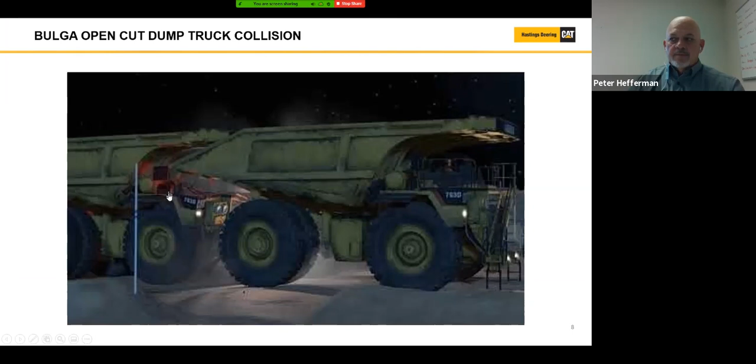At about 3:30 a.m. on 23rd of July 2018, a mine worker was driving an unloaded Caterpillar dump truck along a haul road at the Bulga open cut mine towards an intersection. The road and the intersection were not illuminated. The driver saw a grader, another dump truck, and a water cart at the intersection. The driver stopped to give way to the other vehicles in accordance with the mine's road rules.

Another mine worker was driving a second unloaded Caterpillar dump truck along the same haul road. He noticed that the truck ahead was coming to a stop. The driver lifted his foot from the accelerator to allow his truck to slow with the intention of stopping behind the truck. At that time, the driver became unresponsive as a result of a microsleep or medical condition.

The truck collided with the rear of the stopped truck. At the time of the collision, the truck was traveling at 41 kilometers per hour. The force of the collision moved the stopped truck forward about 20 meters.

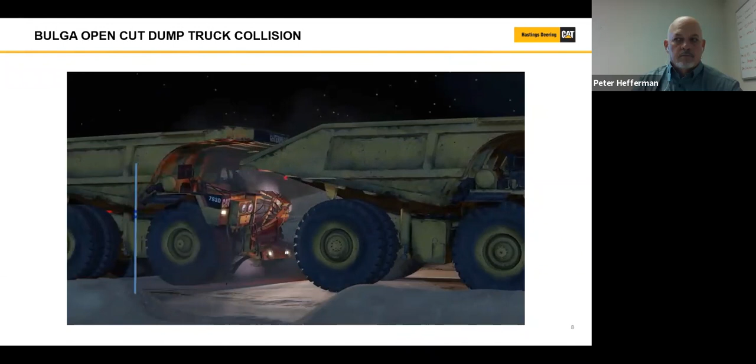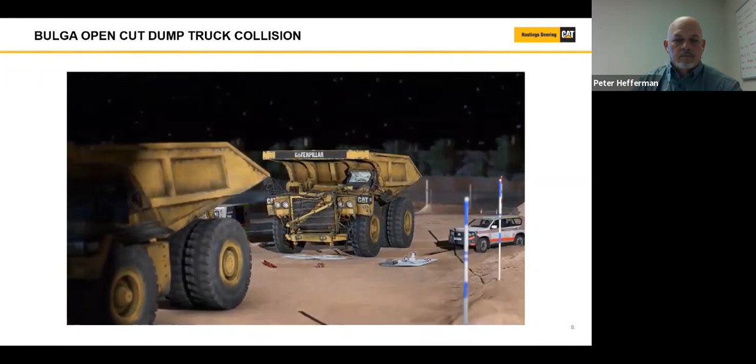An emergency response was activated. The driver was trapped with his right foot twisted between the brake and accelerator pedals. Once freed from the cabin, an elevated work platform was used to lower the driver to the ground, and he was transported to hospital by ambulance. He suffered a fractured tibia, laceration to right eye, and minor cuts and bruises.

Following the incident, the mine operator installed a real-time fatigue monitoring system in their heavy vehicle fleet, strengthened their risk controls associated with worker fatigue, and engaged with the worker regarding his fatigue-related events.

It is recommended that mine operators and contractors implement strategies to eliminate or minimize risks associated with fatigue, implement real-time fatigue monitoring systems, implement systems to encourage workers to self-report fatigue and medical conditions, engage with workers about the effective management of fatigue and medical conditions, review roster cycles, and install proximity detection and collision avoidance systems on mobile plant.

It is recommended that workers report to their supervisors when they are fatigued and avoid undertaking high-risk tasks. Report any medical condition that may affect their level of fatigue and work with their employer to implement effective risk control measures. For more information and to see the full report, visit our website.

This was a significant incident which impacted the entire site, and later on during this presentation I'll detail to you a scenario which actually happened to me while I was working on another mine site overseas. But I'll go into that a little bit later - that's a significant incident, and it's horrendous to the people on site that witnessed that.

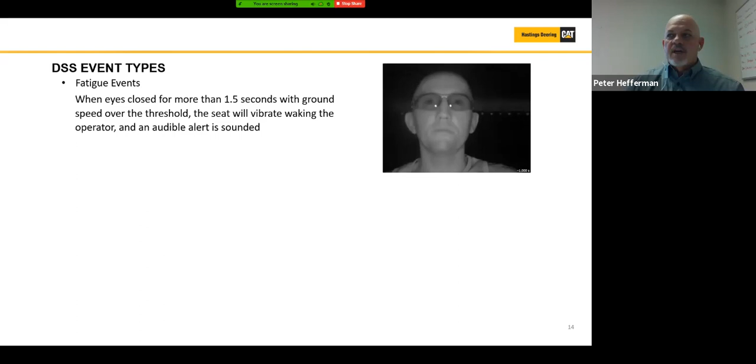These parameters are all set up during install and configured with the Safety Solutions team and mine management for the correct parameter settings used during install. Our third event is field of view exceptions, what we call field of view, or FOV.

These occur when the sensor cannot effectively track an operator's facial points, as described earlier with the dot points around the eyes, nose and mouth. This usually occurs when the operator has moved out of the field of view, leaning over to the left of the seat while driving with their elbow on the window, and the sensor just can't see the eyes, nose or mouth. Or the sensor has been tampered with or covered over.

So the site is alerted via email to rectify this issue. This is usually for about a 10-minute period. So if a sensor can't track the eyes, nose or mouth in a 10-minute period, an email will be sent to site to alert them that there is an issue with that machine and to go have a look at it.

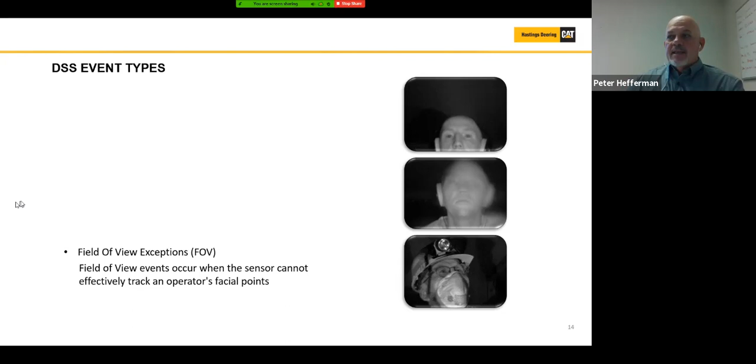So in saying that, that's the CAT DSS. And what we have here, part of the DSS and the smart band, which we just went through, both those solutions we put together to collect data for a fatigue risk assessment.

So as you can see up here on the slide is event data from a site that had DSS installed. A fatigue risk assessment is usually spanned over a 90-day period. The first 30 days, the DSS is installed but running in silent mode, so the system is capturing data for baseline but doesn't alert the operator if there are any events. We can see here in the first 30 days on the slide quite a significant amount of fatigue events for this particular site, and on day 30 we initiated the operator alert.

So the seat vibration and the in-cab audible alert were activated. You can see here from day 30 to day 60, a significant drop in the amount of events almost instantly, the count dropped straight down. But the count started to creep back up again towards the end of the 60 days, around day 45, day 50. Operators were starting to get used to the system, getting used to the vibrating alert waking them up.

So on stage 3 of a fatigue risk assessment, we bring in the CAT USA team into the picture. These people filter the data looking for false or positive events. When a positive event happens on day 90 of the fatigue risk assessment, CAT rings site. They ring the nominated supervisor for each shift according to the customer requirement document we send out to site, and the fatigue intervention plan document. So CAT has all this information in the USA, and they ring site to ask the site supervisor or site contact to initiate the fatigue management plan on that operator.

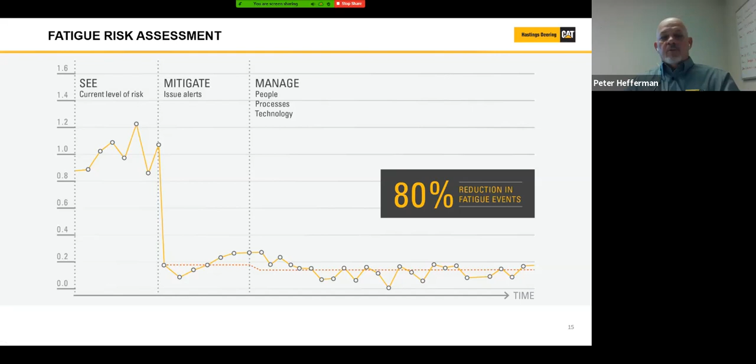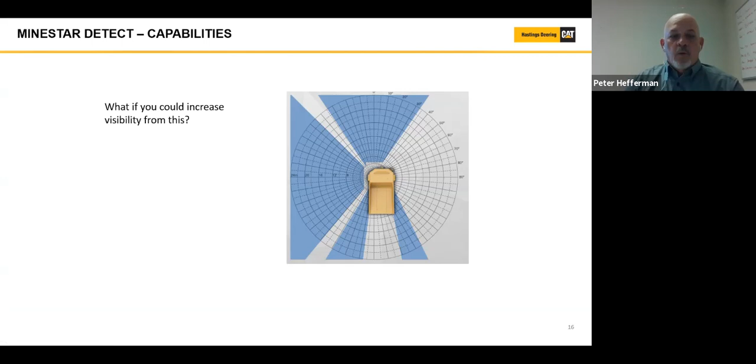So what if you could increase awareness for the operator from this, to this? What we have now is 360-degree awareness around the machine, for an operator. It doesn't have to be specifically a haul truck - it can be a dozer, a light vehicle, a grader, a water cart, an excavator, a loader. So they're all machines this next solution can fit on quite easily and start assisting operators with proximity awareness and knowing what's happening around their machine.

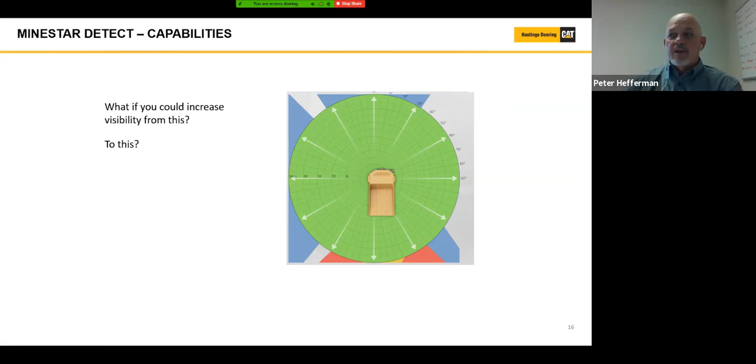So proximity awareness, that's another solution, the CAT Detect suite of products. It uses the V2X solution, which is V for vehicle, 2 and X for any machine - vehicle to anything. So that's the solution we use, called proximity awareness.

Over many years I've been in this industry, I've seen multiple incidents involving equipment running over light vehicles, lighting plants, or reversing into other equipment. It happens quite regularly on mine sites all around the world. So this next story I'm about to tell you is an actual real event that happened to me while I was working in the Middle East, in a country called Jordan.

I was production manager of a phosphate mine over there. We were short a couple of trucks, so I rang up our sister pit, which is 5 kilometres away, and said, 'Hey guys, can you send us over 2 trucks and a couple of operators?'

Which they did. So we worked those people during the day, and we called them and said, 'You need to head back home, it's getting near knock-off time.'

So these 2 operators decided to take a shortcut. Instead of following a designated haul road, they decided to go across the desert quicker, cutting about 2 kilometres off the path, which is 4 minutes of time. So they decided to take a risk to save themselves 4 minutes, and the end of the story is not very pleasant.

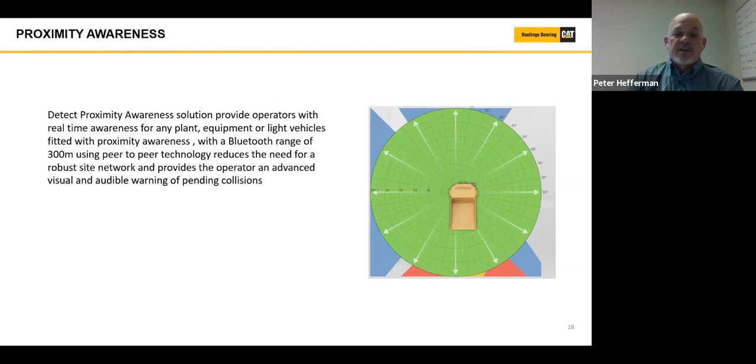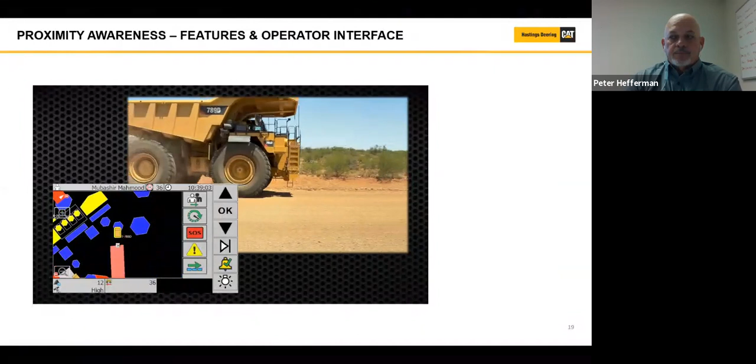Speed limits can be defined at the site, machine class, and zone level. When a machine exceeds the specified limit, an alarm is sounded in the cab, an icon is displayed in the status view area, and an event is recorded in the office.

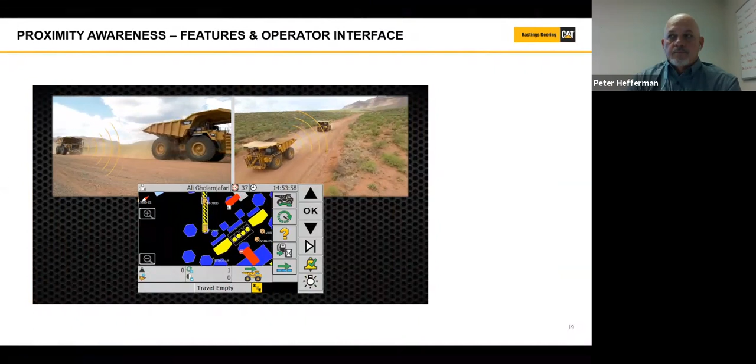All sites have standard operating procedures for following other machines. When one machine follows another too closely, both operators receive an alarm.

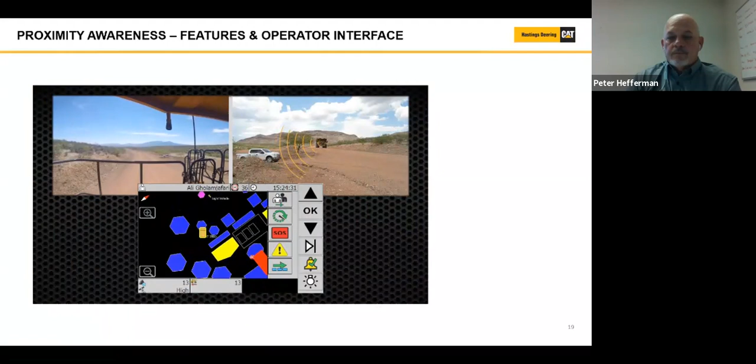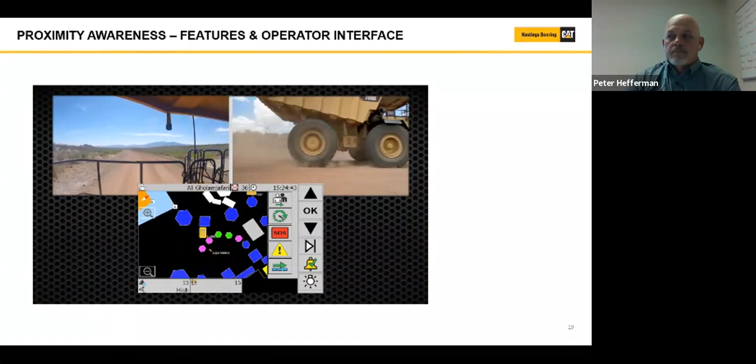Operators know how difficult it is to see light vehicles, especially when they're partially obscured at an intersection. Notice how the berm, tree, and truck railings all obscure the operator's vision. Proximity awareness can notify the haul truck operator of the light vehicle before they ever see it via peer-to-peer communications.

Many sites use dozers to spot trucks at the dumps. The machines come into very close proximity, allowing the truck operator to see the dozer operator's signal to stop. Proximity awareness alerts the haul truck driver if they're heading towards or coming too close to the dozer through peer-to-peer communications.

Light vehicles passing machines on a haul road is a common occurrence. Proximity awareness promotes safe behavior by alarming both operators when the light vehicle does not follow standard procedure and gets too close when passing.

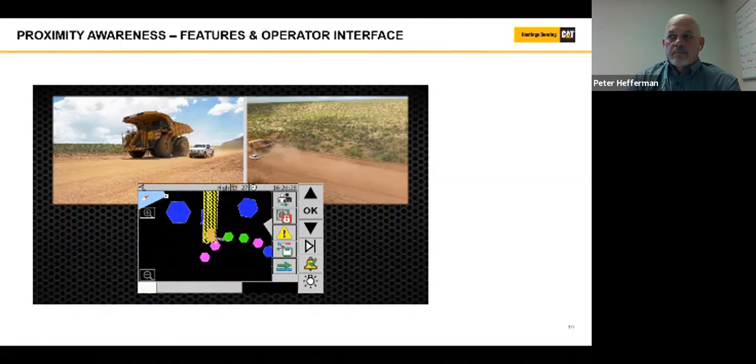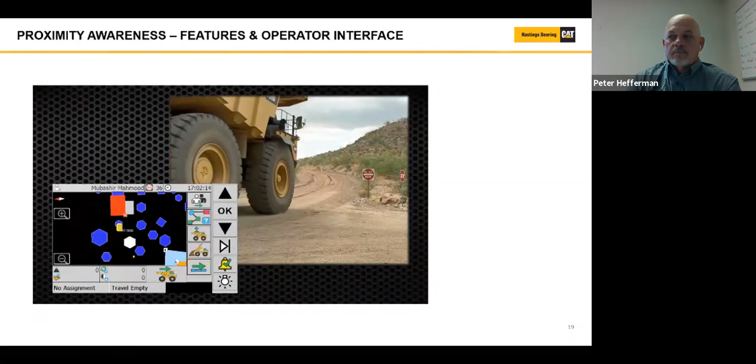Avoidance zones can be defined in the office to alert or warn operators before entering a restricted area. Here, a haul truck driver drives through a do not enter sign into an area not meant for haul trucks.

So that's a little bit on proximity awareness, the V2X solution. Both vehicles are alerted if there's a potential collision. Also, you can put hazard areas into the system, so if a machine or vehicle goes into an area it shouldn't be in, it will alert them on the screen. We can put in speed limits as well, so if there's a speed limit on a particular piece of road, the system will alert the operator that they are speeding. It's a very, very good system, and I just wish we had this system years ago. I'm looking forward to this system.

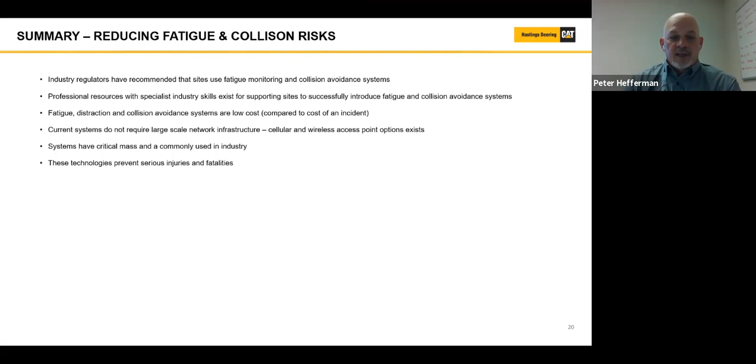So a bit of a conclusion on what I've shown you in the last 30 minutes. To summarise the presentation, I've previewed the CAT Smart Band, the driver safety system, fatigue risk assessment and proximity awareness solutions that are now available, and how these solutions can greatly assist in fatigue management and day-to-day operations. Some key points.

Industry regulators have recommended that sites use fatigue monitoring and collision avoidance systems. For fatigue monitoring, we have in excess of 500 units of the driver safety system up in the Queensland, Northern Territory and PNG areas. That's very good. Professional resources with specialist industry skills exist for supporting sites to successfully introduce fatigue and collision avoidance systems. Fatigue, distraction and collision avoidance systems are low cost compared to the cost of an incident.

Current systems do not require large-scale network infrastructure. Cellular and wireless access point options are available. Systems have a critical mass and are commonly used in industry. These technologies prevent serious injuries and fatalities.

So that is the end of today's presentation. I'd like to hand back to Samantha for question and answer time to wrap up the webinar.